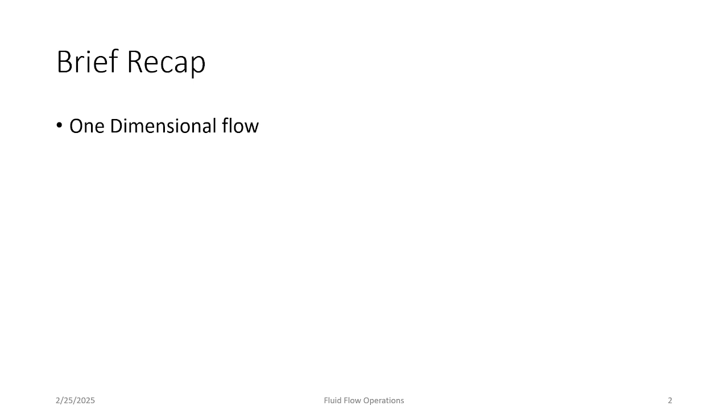and conservation of momentum. This week we'll be discussing the flow of viscous fluids. We'll be deriving the Navier-Stokes equation and looking at a few cases where we can apply it. But before going into this derivation, we need to first understand what is meant by viscous flow.

So what is viscous flow? In general, all the equations that we derived earlier are based on ideal fluid. We assume ideal behavior of fluid and derive equations based on that. What is an ideal fluid? It is nothing but a non-viscous fluid, meaning we assume the liquid has zero viscosity, so it's a non-viscous liquid, which is an ideal fluid. Based on these ideal properties, we derived all these equations.

But in general, this is just an assumption. There is nothing called an ideal fluid. Using this ideal fluid assumption, we derived and discussed the basic equations based on mass, energy, and momentum. But in practice, there's nothing like an ideal fluid, because every liquid existing in nature has viscosity; there is no liquid with zero viscosity.

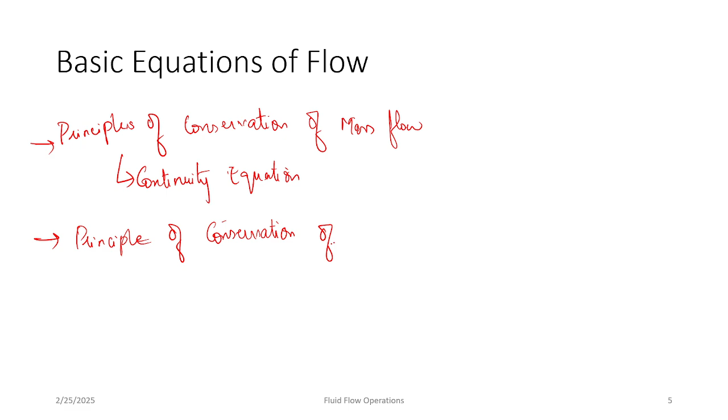So we have three basic equations. The first one is the principle of conservation of mass flow, also known as the equation of continuity. Then we have the principle of conservation of energy, also known as the energy equation. And then we have the principle of conservation of momentum. These are the three basic equations we derived in the earlier class.

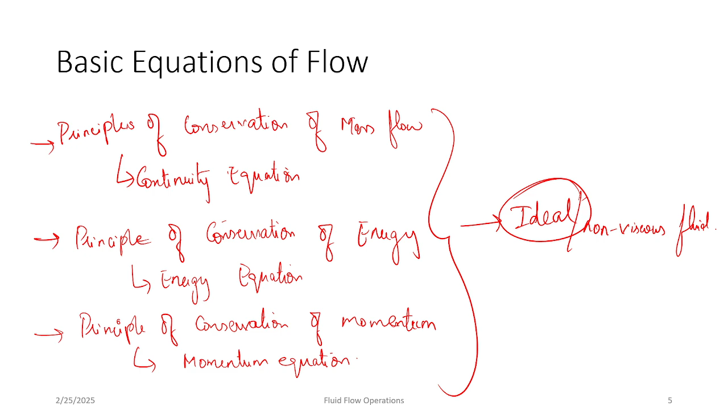In all these three equations or laws, we assume that the fluid is ideal, or non-viscous. Whereas in practical or real cases, we don't have anything called an ideal fluid, so we have to take into consideration all the viscous forces, which cause frictional losses. So here comes the Navier-Stokes equation for viscous fluids.

This equation was proposed by Navier, a French engineer and physicist. In order to derive this equation, let's assume an elementary rectangular fluid element. Let's say this is X and Y.

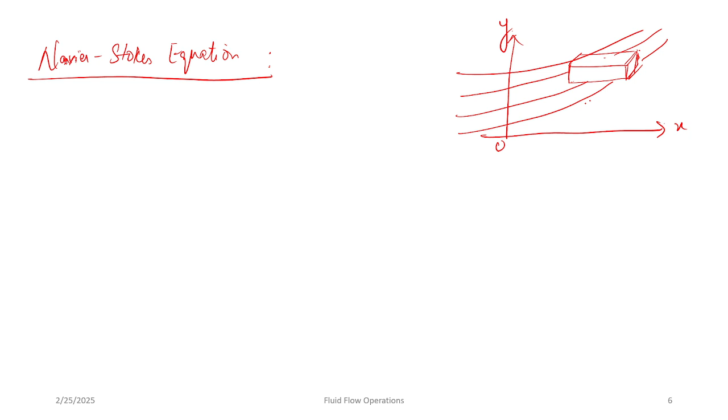Okay, so this is in stream of flow. Currently we are in two-dimensional. We'll be dealing with two-dimensional flow, so we'll be having both velocity in y direction and also velocity in x direction.

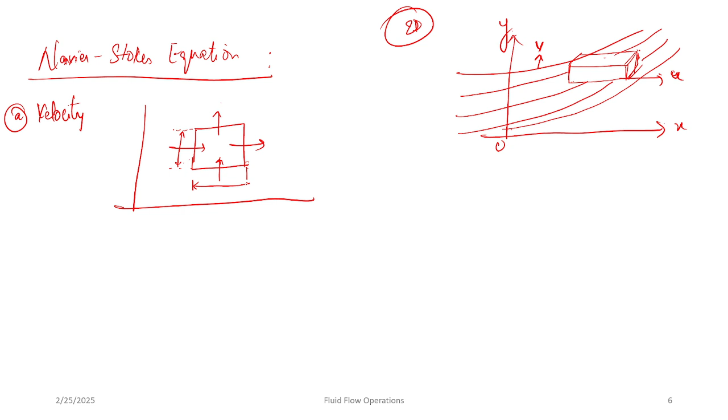Okay, so let's resolve this into different forces. First, let's check velocity. If we draw velocity profile for this elemental fluid, so dimensions of this elemental fluid will be dx and dy.

So in x direction, velocity will be u. After passing through this fluid element, there will be a loss or gain of energy. Let's denote it as dou u by dou x. So the final velocity will be u plus dou u by dou x into dx, that is change in velocity.

And also here initial velocity will be in y direction v, and the final velocity after passing the fluid will be v plus dou v by dou y into dy. So similarly, let's balance forces for pressure and angular deformation as well.

So coming to pressure, so again we'll take this as the dimension of the fluid element in y direction, that is dy, and this is the dimension of fluid element in x direction, that is dx. So again pressure will be P at the entrance of this fluid element, and at the exit it will be P plus dou P by dou y into dy. This is nothing but change.

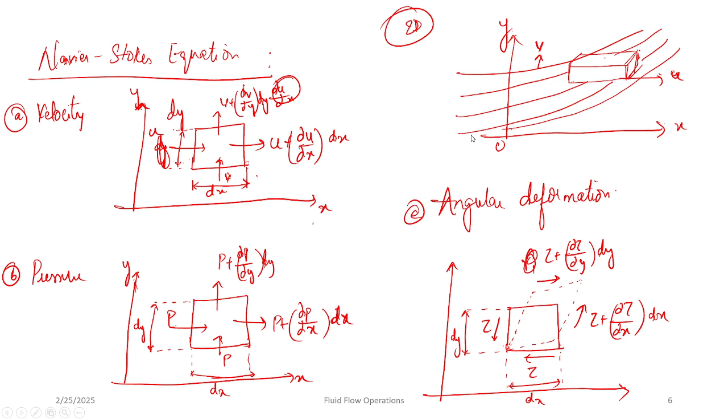So let's also consider this element, and we'll try to derive a relation between tensile stress and shearing stress.

Okay, so let's say this is the position of the fluid element initially, and you're applying a stress in this direction, or we are elongating the fluid element in the x direction. So if you're elongating it, what happens to the y direction? Force will be in this direction.

So when you're elongating the fluid element in x direction, there will always be a compression force acting in the y direction. So the final position of the element might be something like this, getting elongated in x direction and getting compressed in the y direction.

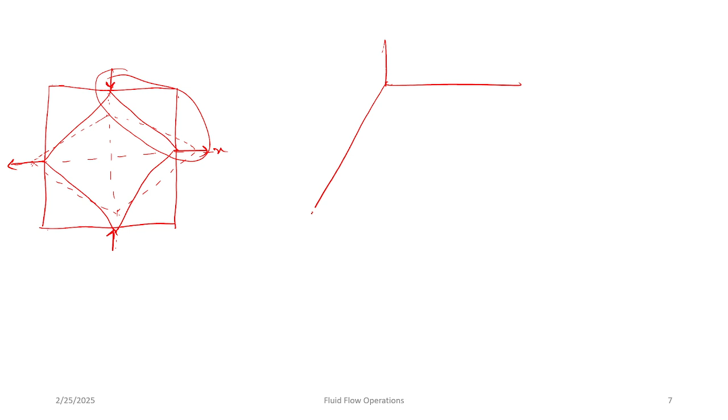So let's resolve this. Let's take this section. Let me first draw it. So if here the element is being displaced to a certain distance in y direction, through a certain distance, so in y direction it is compression force, and here it is elongation in the x direction.

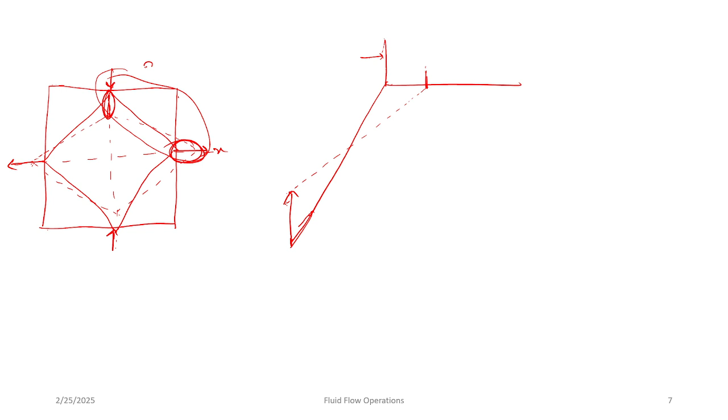So just try to observe both these diagrams and you'll be able to identify all the coordinates. So let's say here the fluid element is getting compressed through a certain distance - let's say this is dou v by dou y. And in x direction, let's say this is dou u by dou x. So this dou u by dou x and dou v by dou y, they should be same.

Even though they're in opposite direction, they should be same, because you cannot change the quantity of mass. But when you're increasing in one direction, it should always be decreasing in the same amount in the other direction.

Okay, so you're elongating in the x direction, so it will be compressed in the y direction, but through the same displacement. So let's say this is the elongation force that you're applying. Let's say this is sigma x, and this is also sigma x, but in the opposite direction, so this will be minus sigma x. And here, let's say this compression force is sigma y, and this is minus sigma y, because this is positive and this should be in the negative direction.

And the forces experienced by the side of the element, let's say this is tau. Okay, so these are elongation forces, and this is a shear. So these are tensile stresses, and this is a shearing stress. Tau is a shearing stress which will be experienced by the side of the fluid element. We'll use this when we are solving the problems. So whenever there is elongation on one side, there will be compression on the other side. So let's calculate the force equations.

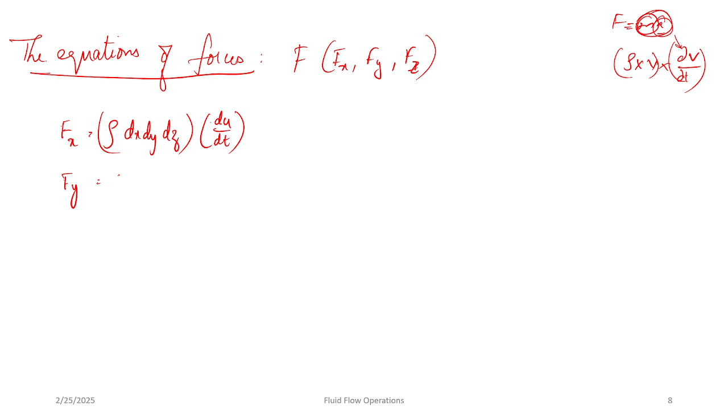And Fy will be rho into dx dy dz, that is mass into rate of change of velocity in the y direction, and Fz will be rho into dx dy dz into dw by dt.

The velocity change at time dt can be expressed as... let's say this is equation 1.

Okay, combining all these three, let's say this is 1, and du can be written as dou u by dou t into dt plus dou u by dou x into dx plus dou u by dou y into dy plus dou u by dou z into dz.

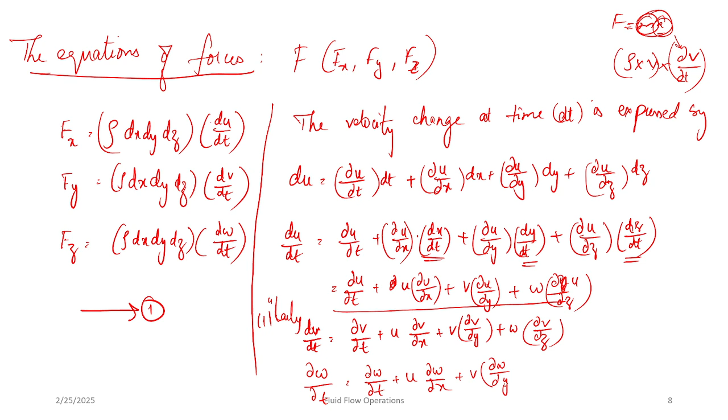So similarly, we can write for dV and dW as well. For dV by dt, we can write this as dou V by dou t plus U into dou V by dou x plus V into dou V by dou y plus W into dou V by dou z. And similarly for the z direction, it will be dou W by dou t plus U into dou W by dou x plus V into dou W by dou y plus W into dou W by dou z.

So if you substitute these values of velocities in equation 1, let's say this is equation 2, 3, and 4. So substitute 2, 3, and 4 in equation 1.

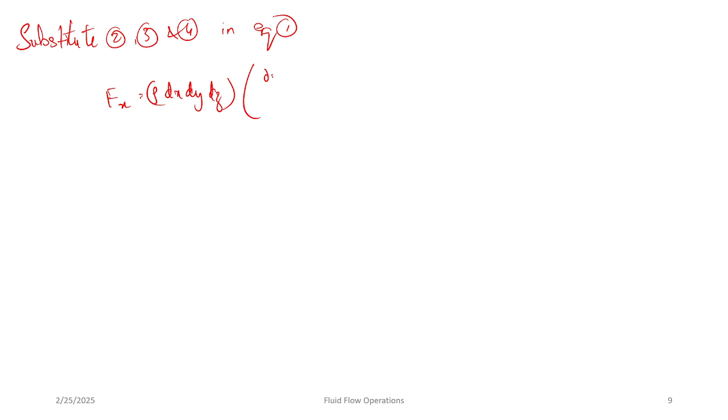So this gives us fx is equal to rho into dx, dy, and dz. This is mass, into velocity, that is du by dt. So this becomes dou u by dou t plus u into dou u by dou x plus v into dou u by dou y plus w into dou u by dou z.

And fy will become dou v by dou t plus v into... sorry, this is u, right?

u into dou v by dou x plus v into dou v by dou y plus w into dou v by dou z. And for the z direction as well, it will become dou in rho into dx dy dz into dou w by dou t.

Plus u into dou w by dou x plus v into dou w by dou y plus w into dou w by dou z. So let's call this equation 5. So whenever a fluid element is in water, or let's say in the fluid, it will be experiencing three different types of forces, right? It will be body force, the second one will be pressure force, and the third one will be viscous force.

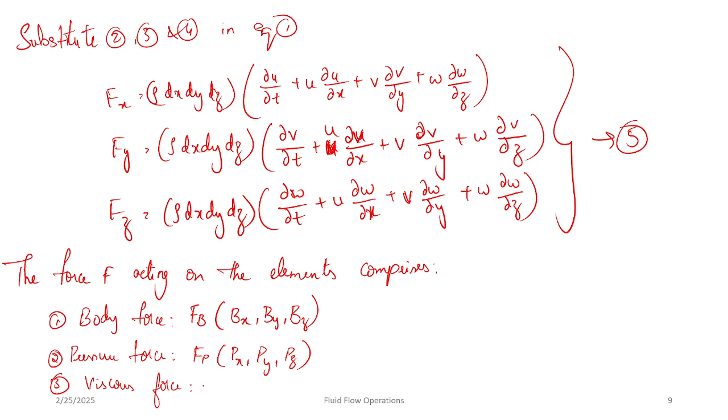So body force, that is FB, let's say this is represented by Bx, By, and Bz, where B stands for body force. And the pressure force, let's say this is FP, denoted by Px, Py, and Pz, the pressures in x, y directions. And viscous forces are FS, that is Sx, Sy, and Sz. These are the components in the three different directions.

So if you want to express Fx, that is the force experienced by the body in x direction, that will be a combination of body force in x direction, pressure force in x direction, and viscous force in x direction. So we can say Fx will be Bx plus Px plus Sx. Similarly, force experienced by the body in y direction will be By plus Py plus Sy, and Fz will be Bz plus Pz plus Sz. Let's call this equation 6 combinedly. So these are the three different forces experienced by the body.

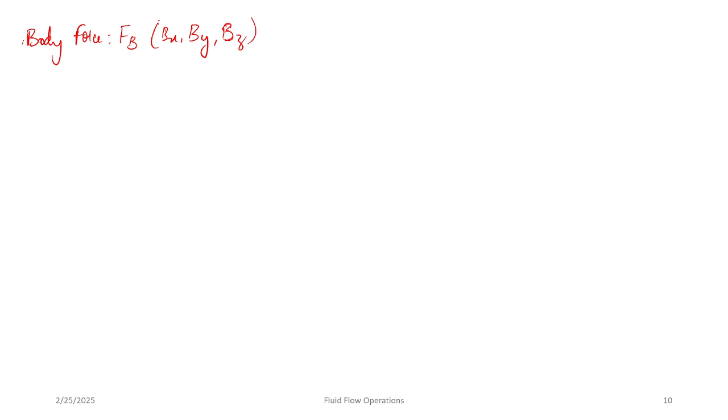So what are these body forces? Which forces are commonly called body forces? Body force, that is Fb, is represented by Bx, By, and Bz. These forces act directly through the mass of the substance or element. So these forces include gravitational force, centrifugal force, and electromagnetic force.

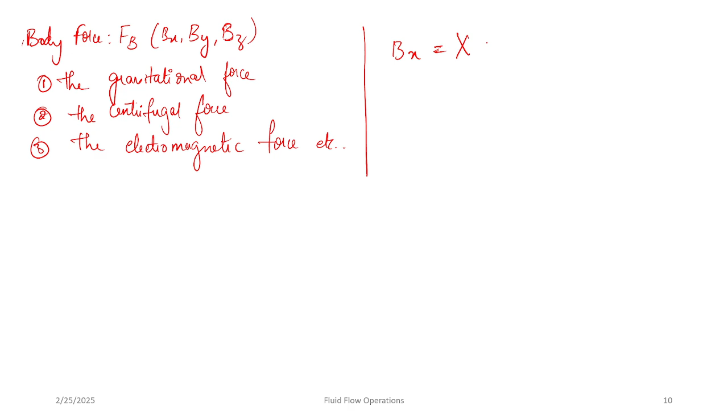So Bx will be basically the combination of all these three forces: gravitational, centrifugal, and electromagnetic. We can write this as X into rho dx dy and dz. So let's say X, Y, Z (capital) are the axis components of these body forces. If they represent the body forces experienced by the mass of fluid, then we can write Bx, By, Bz as follows. And then we have pressure forces, represented as Fp, also Px, Py, and Pz.

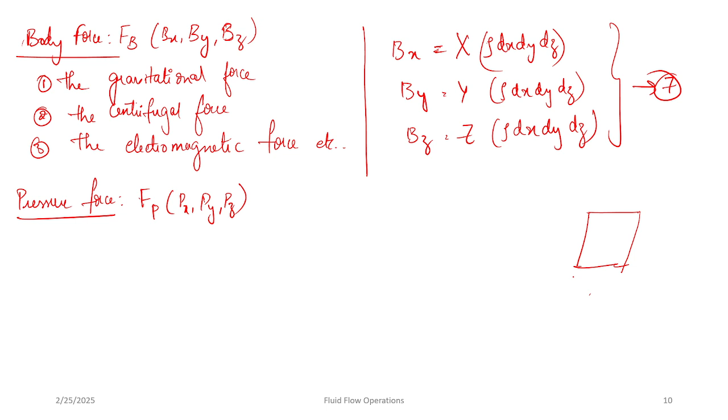So let's consider the fluid element. Let's say the flow is in this direction, that is the x direction. So the force experienced by this side will be pressure into area, since P is equal to F by A, so F will be P into A.

So the pressure exerted on this face will be P into the area of this element, that is dy into dz. And on this direction, the pressure exerted will be P plus dou P by dou x into dx, into the area of the element, that is dy into dz. Similarly, we'll have y and z components as well, so let's write them down.

So Px, that is the force experienced in the x direction, will be initial force minus final force. So initial force is P into dz into dy, minus final force, that is P plus dou P by dou x into dx, into dz dy. This will give us minus dou P by dou x into dx dy dz.

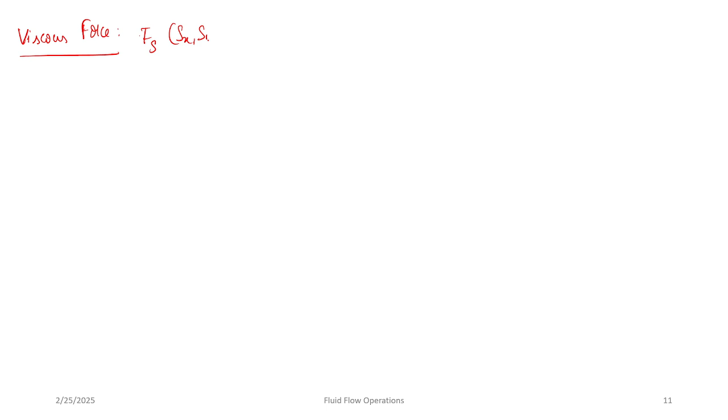So we have dealt with body forces, pressure forces, and now we are left with viscous forces. So let's also consider the viscous force. This is denoted by Fs, that is Sx, Sy, and Sz. So the force in the x direction due to angular deformation is represented by Sx1. Let's refer back to this diagram, from this we can write, and also whenever there is a stress, it will also be experiencing strain, right?

So Sx1 will be dou tau xy by dou y plus dou tau xz by dou z, multiplied by dz dx into dy. Because this is basically stress, and we want to calculate force, we multiply by area. This gives us mu into dou square u by dou y square plus dou square v by dou x dou y, plus dou square u by dou z square plus dou square w by dou x dou z, all multiplied by dz dx dy.

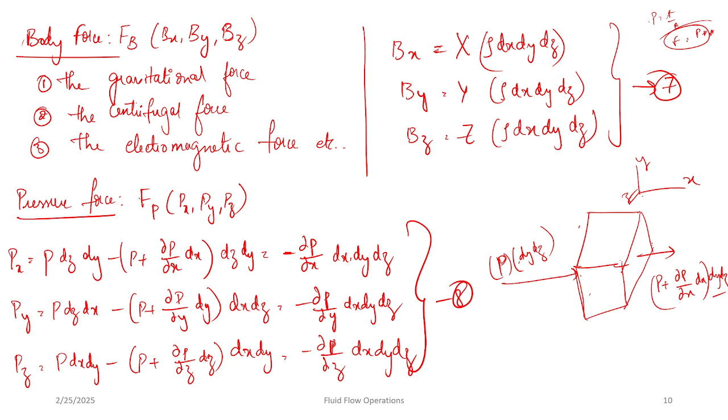We've already established this, I forgot to mention it earlier: dou u by dou x should equal minus dou v by dou y. If you differentiate this with respect to x, it becomes dou square u by dou x square, which equals minus dou square v by dou x dou y. So we'll use the same relation to replace this quantity. Instead of dou square v by dou x dou y, we'll be writing minus dou square u by dou x square.

So the forces in the x direction due to elongation transformation, that is Sx2.

Let's consider the rhombus that we were considering earlier. Let me go back. So let's consider this same element, say this is EFGH, inscribed in a fluid element ABCD of unit thickness, as shown in the figure.

Let the flow be elongated in the x direction, and in the y direction let it be a contracted flow. So in x direction we have expansion or elongated flow, and in y direction we have compression or contracted flow. This deformation in x and y directions provides a simple angular deformation, because of opposite directions at 90 degrees, which causes rotation of the face of the rhombus, resulting in a small shift in the face of the rhombus.

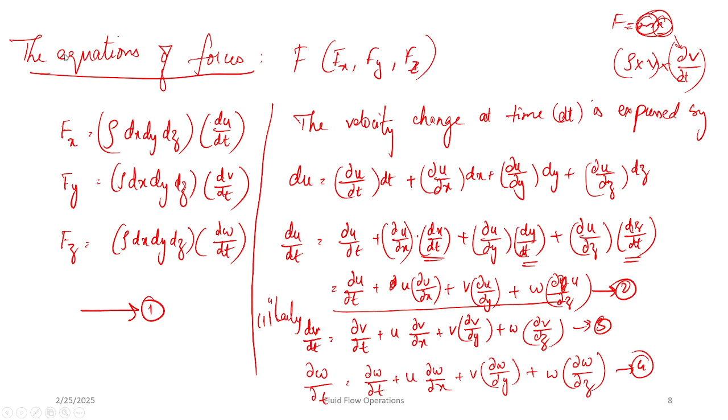Now we'll calculate the deformation per unit time, that is the velocity of angular deformation.

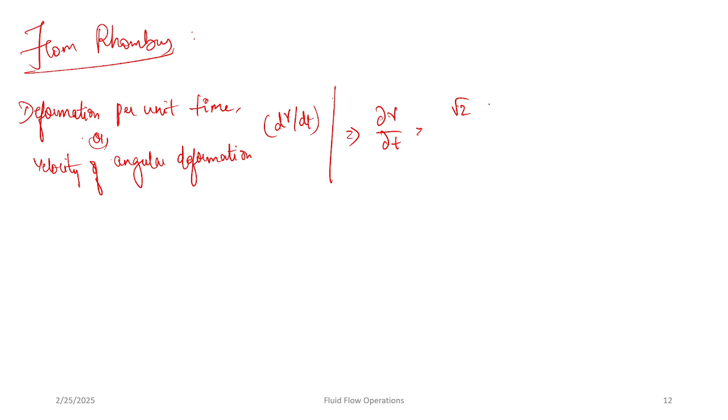This is expressed as d gamma by dt. We can write dou gamma by dou t as equal to square root of 2 into dou u by dou x, divided by root 2. This gives us dou u by dou x. This is equation 11.

Therefore, shear stress acts on all four faces, that is E, F, G, H. So tau will be mu into dou gamma by dou t, which equals mu into dou u by dou x. This is equation 12.

So for equilibrium of forces acting on EG, that is on this face, due to tensile stress sigma x and the shear forces tau on EH and HG, we can write sigma x as 2 into root 2 into tau cos 45 degrees. It will be 2 tau.

So sigma x will be 2 mu into dou u by dou x, right? Now consider the fluid element having sides dx, dy, and dz, where dz is the thickness. So the tensile stress in x direction at a distance dx will be sigma x plus dx, equal to sigma x plus dou sigma x by dou x into dx. Let's say this is equation 15.

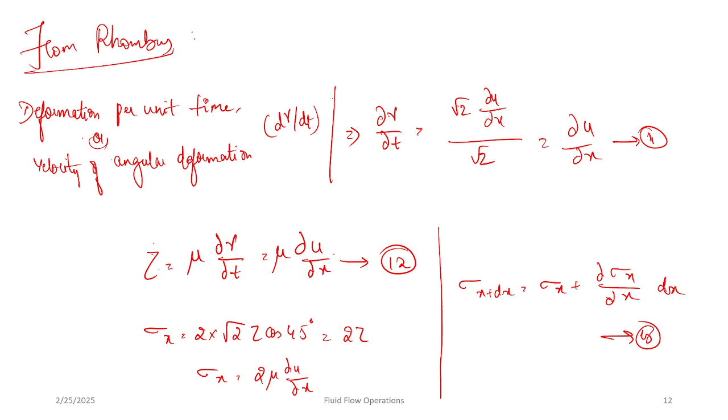So the tensile stress in x direction acts on the face of area dy dz. So Sx2 in xy direction will be minus sigma x into x, so sigma x in x direction into dz dy, plus sigma x at x plus dx into dz dy.

This will be equal to minus sigma x plus dou sigma x by dou x into dx into dz dy, which will be equal to dou sigma x by dou x into dz dy dx. This gives us 2 into mu into dou square u by dou x square into dz dy and dx. Let's say this is equation 16.

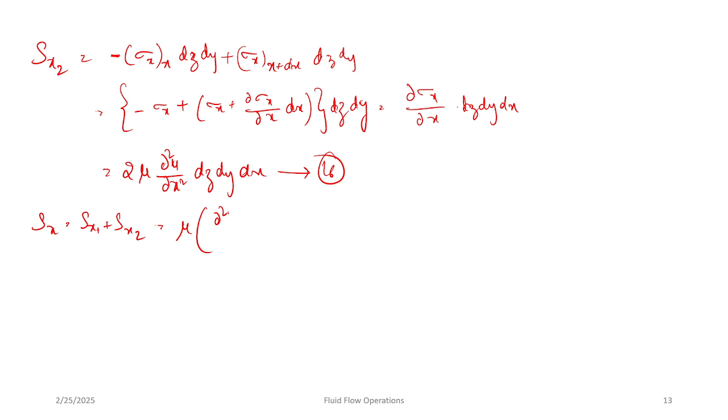From this you can write Sx as Sx1 plus Sx2. This gives us mu into dou square u by dou x square plus dou square u by dou y square plus dou square u by dou z square into volume, which is dx dy dz.

And Sy will be Sy1 plus Sy2, equal to mu into dou square v by dou x square plus dou square v by dou y square plus dou square v by dou z square into dx dy dz. Similarly Sz will be Sz1 plus Sz2, equal to mu into dou square w by dou x square plus dou square w by dou y square plus dou square w by dou z square into dx dy dz.

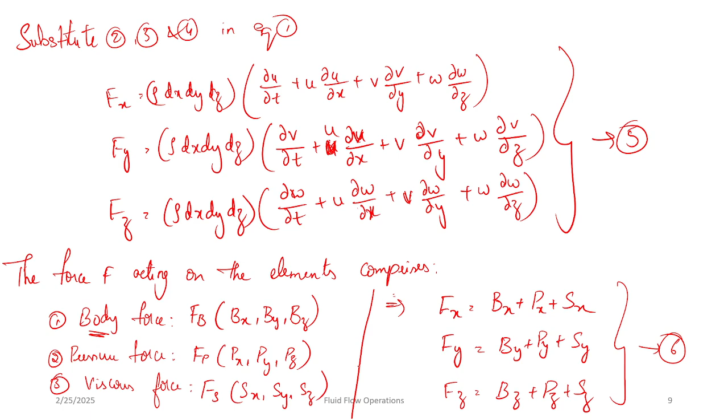rho into dou u by dou t plus u into dou u by dou x plus v into dou u by dou y plus w into dou u by dou z. This should be equal to rho x minus dou p by dou x, that is body force, pressure force, plus angular deformation force into mu into dou square u by dou x square plus dou square u by dou y square plus dou square u by dou z square.

And we also have rho into dou v by dou t plus u into dou v by dou x plus v into dou v by dou y plus w into dou v by dou z, which will be equal to rho into y minus dou p by dou y plus mu into dou square v by dou x square plus dou square v by dou y square plus dou square v by dou z square.

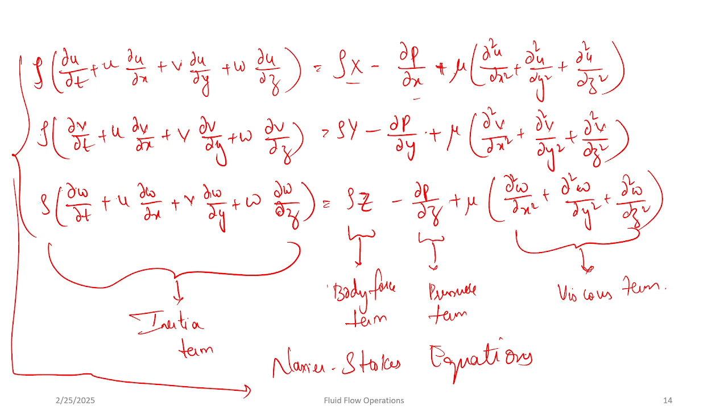Okay, so if you don't have any doubts, let's see the cylindrical coordinates as well. This is in Cartesian coordinate, right, in x, y, z. Let's also see the Navier-Stokes equation in cylindrical coordinates. So in the cylindrical coordinate system, the continuity equation for a constant density will be... first let's write the continuity equation.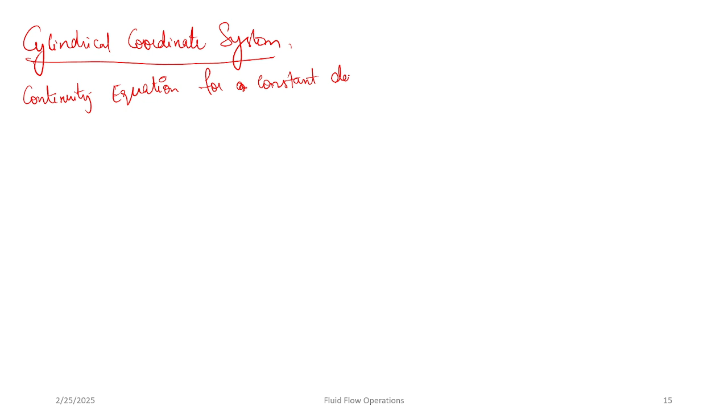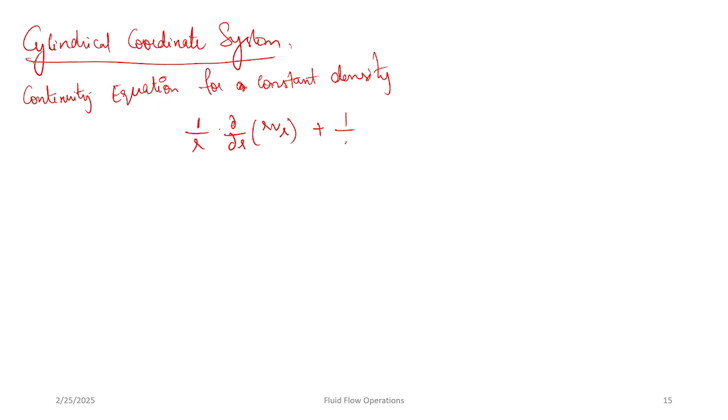So we have 1 by r into dou by dou r into r v r, plus 1 by r into dou by dou theta into v theta, plus dou by dou z into v z. This will be 0.

So normal and shear stresses in cylindrical coordinates for a constant density system and viscosity can be written as: sigma rr is equal to minus p plus 2 mu into dou vr by dou r.

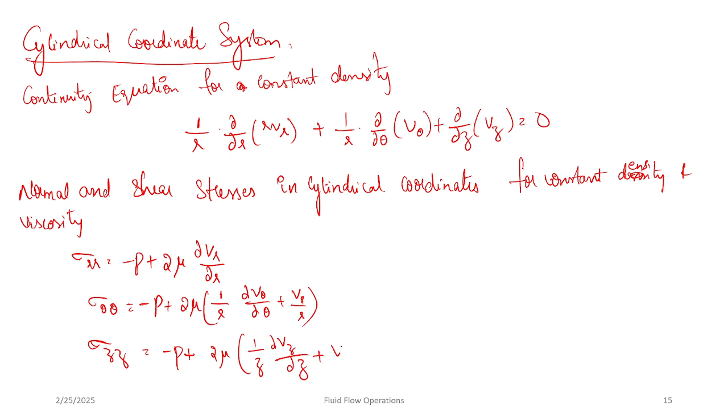Then sigma theta theta will be equal to minus p plus 2 mu into 1 by r into dou v theta by dou theta plus vr by r. And sigma z direction will be minus p plus 2 mu into 1 by z into dou vz by dou z plus vr by r.

Similarly, shear stress tau r theta will be equal to mu into r into dou by dou r into v theta by r, plus 1 by r into dou vr by dou theta.

And we have tau theta z will be equal to mu into dou v theta by dou z plus 1 by r into dou vz by dou theta.

And then we have tau z r will be equal to mu into dou vr by dou z plus dou vz by dou r. Okay, so this is for cylindrical coordinate system.

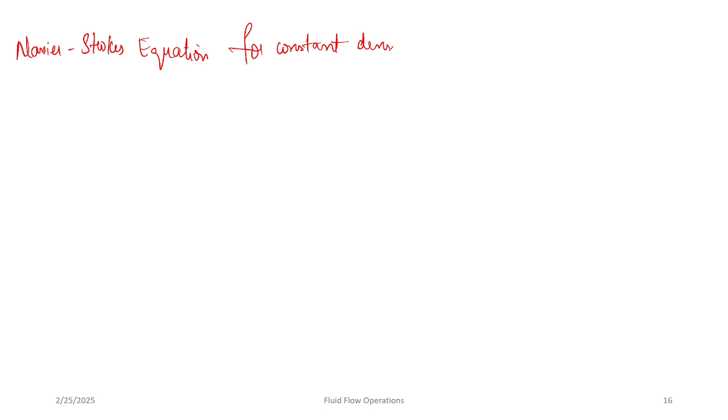So the Navier-Stokes equation in cylindrical coordinates for constant density and viscosity will be given. This is in cylindrical coordinate system. Okay, first the R component.

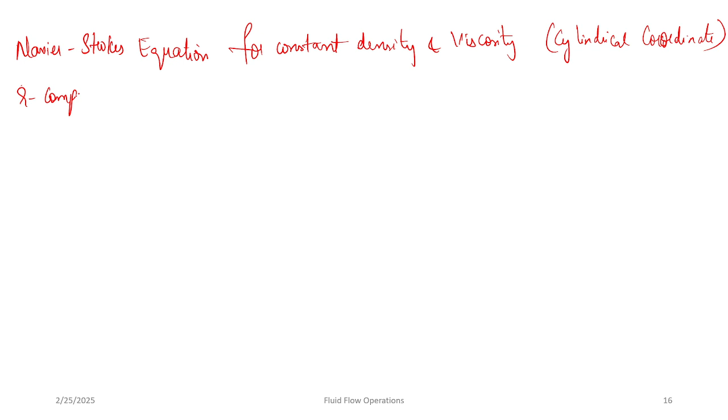So R component will be rho into dou VR by dou T plus VR into dou VR by dou R plus V theta by R into dou VR by dou theta minus V theta square by R plus Vz into dou VR by dou Z. This should be equal to body forces, that is rho gR minus dou P by dou R, which is the pressure term,

plus the viscous term, that is mu into dou by dou R into 1 by R into dou by dou R into R VR, plus 1 by R square into dou square VR by dou theta square, minus 2 by R square into dou VR by dou theta, plus dou square VR by dou Z square.

So cylindrical coordinates is a bit complicated, right? That is why we are having these many terms and it's a bit confusing. So don't worry. If you are comfortable with cylindrical system, you'll be able to understand this.

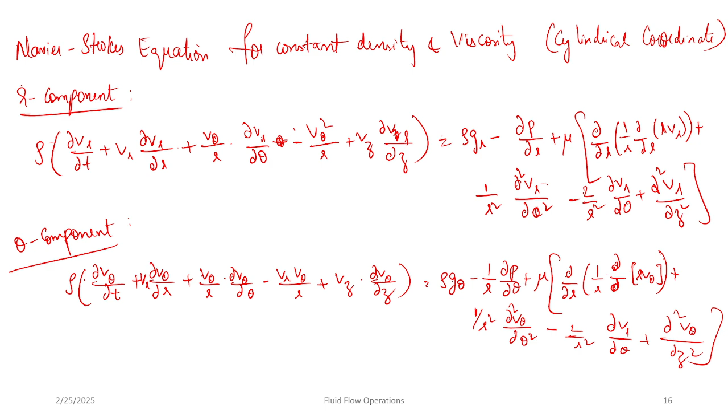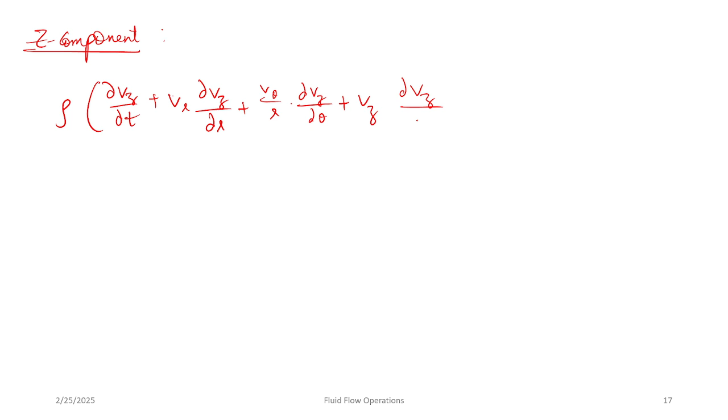Okay, so and then we have the z component. This will become rho into dou vz by dou t plus vr into dou vz by dou r plus v theta by r into dou vz by dou theta plus vz into dou vz by dou z. This should be equal to rho into gz minus

dou P by dou Z plus mu into 1 by R into dou by dou R into R dou VZ by dou R, plus 1 by R square into dou square VZ by dou theta square, plus dou square VZ by dou Z square.

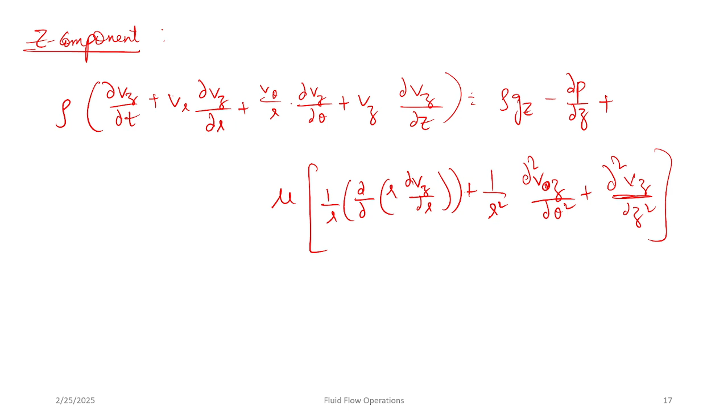So if we take an example, I think we'll be late, so I'll just move on to the next concept, that is velocity distribution of a laminar flow.

In the Navier-Stokes equation, the convective acceleration term is a non-linear term, so it will be difficult to obtain an analytical solution for general flow. The strict solutions obtained to date are only for special cases: one is flow between parallel plates, the other is flow in circular pipes.

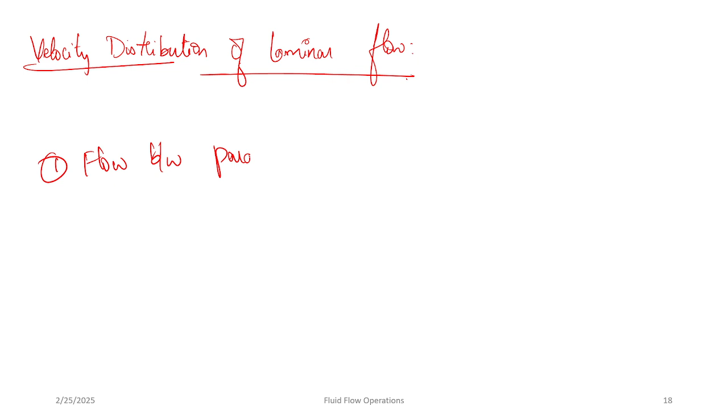The first one is flow between parallel plates, and the other special case is flow in circular pipe. These are the only two special cases where we got a strict or exact solution using Navier-Stokes equations. For other cases we will not be able to do it, because the convective acceleration term is non-linear. But before solving this problem, let's go back and revise a few concepts—we already discussed laminar and turbulent flow, right?

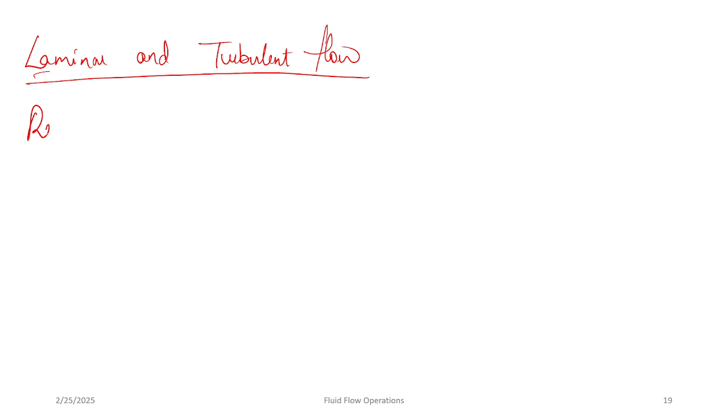So how do we distinguish between laminar and turbulent flow? We will be using something called Reynolds number, also represented as Re. So if Re for a particular fluid stream is less than 2300, we call it laminar flow.

We call it laminar flow, and this laminar flow is predictable, and there will be slow mixing. And if Re is in between 2300 and 4000, let me write like this: 2300 less than Re less than 4000.

So then this is called transitional flow. Here we have turbulent outbursts, so turbulence starts in this region, and then we have Re greater than 4000, which indicates that we are in turbulent motion. This is unpredictable, and there will be rapid mixing.

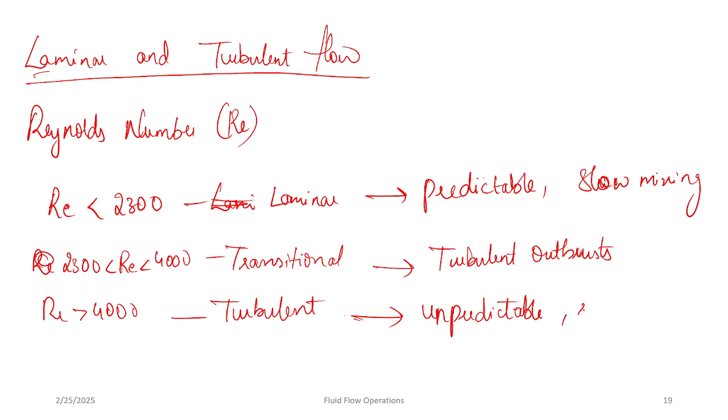Okay, and how do we represent Reynolds number? Re is given as rho u d by mu. Also written as inertia force by viscous force. So this is a non-dimensional number.

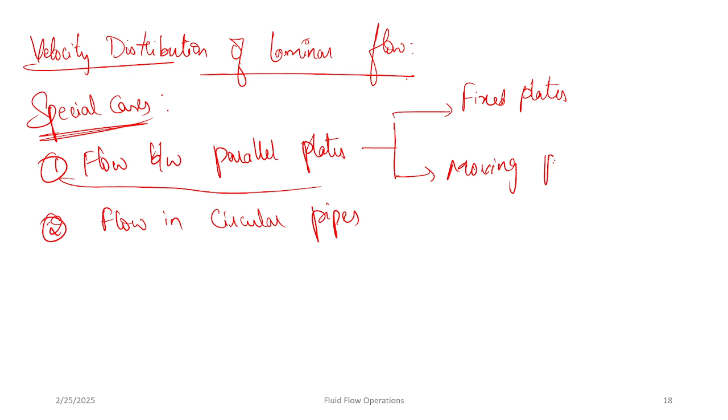So for the first special case that we are discussing, that is flow between parallel fixed plates - flow between parallel plates. Even in this first type, in flow between parallel plates, we have fixed plates, and then we have moving plates. So we have two cases again in this. There's a name for this as well, I'll write it down in a while.

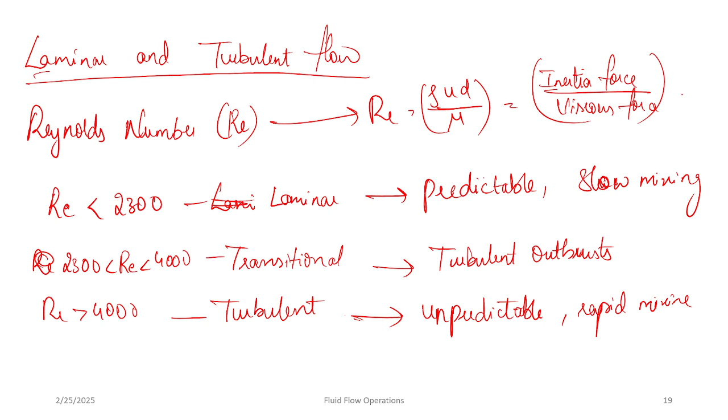So flow between parallel fixed plates - this is called Poiseuille's flow. So let's consider a flow of a viscous fluid between two parallel plates.

Let me draw the figure. So let's say this is a fixed plate and this is also a fixed plate, and they are parallel to each other. And let's say a viscous fluid is flowing in the stream between the two parallel plates. This has just passed the inlet of the flow, and this is at laminar conditions.

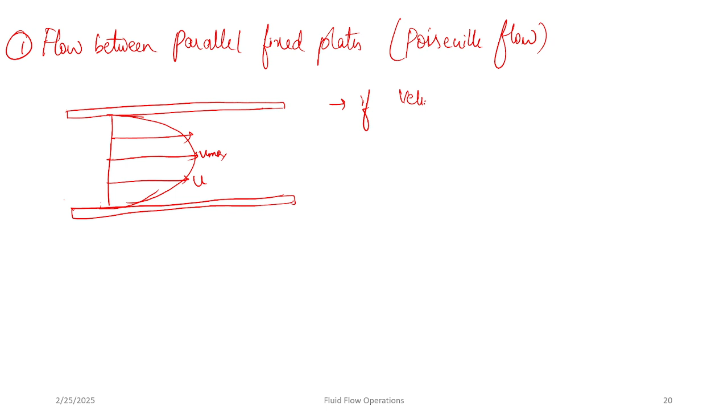So this will be your U max, and this is the velocity at any location, U. So if the velocity is only U, then that is only in one dimension, then V and W will be zero.

If the flow is steady, then U does not change with time, right? If flow is steady, U does not change with time. So dou U by dou T will be zero.

And if there is no body force, we can write rho X as zero. That is the body force term which was in the Navier-Stokes equation, right? So that will be zero.

And if the flow is uniform, then U will also not change with position. If the flow is uniform, U does not change with position, so dou U by dou X will also be zero. These are the assumptions or conditions that we'll be taking for this case.

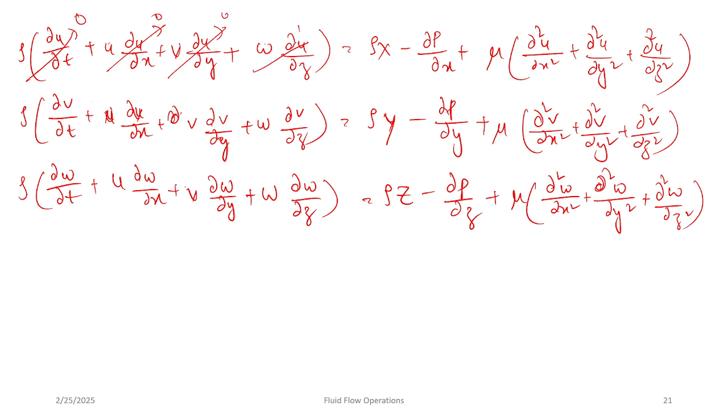Also, there's no change with position, so these terms will be zero. We know there is no body force, so this will be zero, this will be zero, and this will be zero. In the Y and Z directions, there is no flow, so these quantities will be zero. There will be no pressure difference as well, and these terms will also be zero. Dou square u by dou x will be zero, and dou square u by dou z will also be zero, since u is changing only with the y direction.

So this will be the only term left. We'll be left with mu into dou square u by dou y square equals dou p by dou x. Let's say this is equation 1.

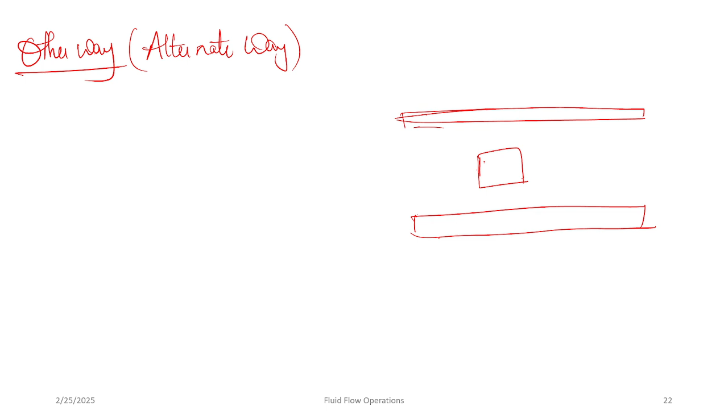You can either use this or do it a different way by considering the fluid element. Let's take two parallel plates again, and consider a fluid element here with dx and dy as dimensions. This is the pressure force, and the shear stress will be tau plus dou tau by dou y into dy, and this will be p plus dp by dx into dx.

Now balance all the forces. Consider balancing all the forces. If you do it right, you will get the same term.

Since there is no change in momentum between the two faces, we can write the equation as p into dy minus p plus dp by dx into dx into dy, minus tau dx plus tau plus d tau by dy into dy, into dx, equals 0. That is equation 2. Just cancel out all the similar terms, and this gets cancelled out, and you are left with d tau by dy equals dp by dx.

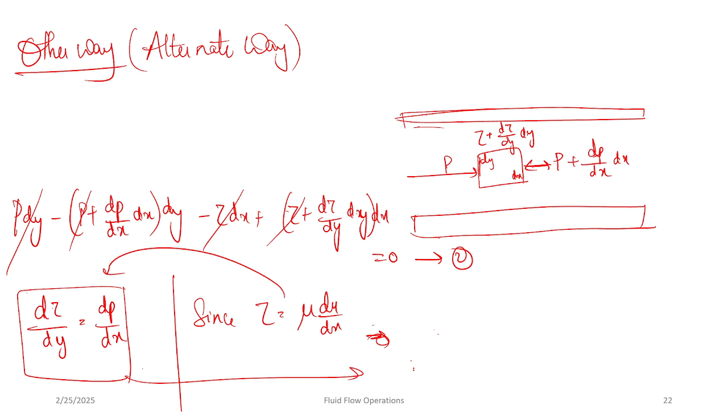Since we have tau as mu into du by dx, if you substitute this in the equation, we get mu into d square u by dy square equals dp by dx. That's equation 3. So you got the same equation, right? Even if you do it from the equation of continuity or if you balance out the forces, you should get the same equation. Now let's take equation 3 and integrate it.

What was the equation? Mu into d square u by dy square equals dou p by dou x. Let's carry out integration. We get mu into du by dy equals dou p by dou x into y plus c1, that's the constant, equation 4. If you further integrate this, you get u equals 1 by 2 mu into dou p by dou x into y square plus c1y plus c2. Let's say this is the second constant.

So we can use boundary conditions to solve for C1 and C2. At y equals 0, and at y equals h, we have two conditions. U will be 0, right? So we'll use those conditions. Boundary conditions: at y equals 0, u is equal to 0, and at y equals h, u will be 0 again. If you apply both these boundary conditions, you have two conditions and two unknowns, so you'll be able to solve it.

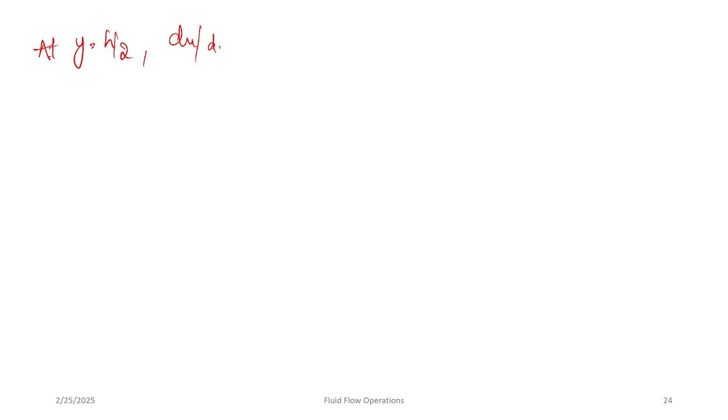You can also calculate flow rate and mean velocity using this. Let's see how. At y equals h by 2, du by dy should be 0 because at the center point u is maximum, u becomes u max. If it's a maximum, then its differential should be 0 - at minima and maxima, du by dy should be 0. So if you use this condition, you will be able to solve for u max.

So u max will be - sorry, if you substitute y equals h by 2 in this equation, you will be able to obtain u max, that is minus 1 by 8 mu into dp by dx into h square. This is equation 7.

So this is equation 6 and this will be 7. Okay, so now volumetric flow rate, how do you calculate it? Volumetric flow rate Q will be equal to area into velocity, right?

So that will be integral 0 to h of u into dy. That equals minus 1 by 12 mu into dp by dx into h cube. Just solve the entire thing, you'll be getting this. So that is equation 8.

And mean velocity or average velocity, u mean will be equal to Q by h, that will be equal to minus 1 by 12 mu into dp by dx into h square.

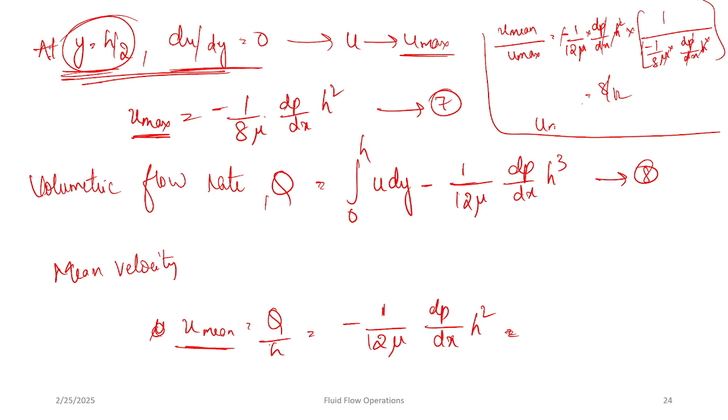So u mean will be equal to 8 by 12 of u max, right? This will be nothing but u mean, sorry, u max by 1.5. Let's say this is equation 9. U max is equal to U mean into 1.5. Okay, so let's say this is equation 9.

And now, what would be the shear stress? What will be the shear stress due to viscosity in this region? So what is the formula for shear stress? That will be tau is equal to mu into du by dy, right? We already have du by dy.

So just take this mu to the other side and we'll be able to get the equation for du by dy. If you substitute this here, or maybe you can directly use this equation. We also know the value for C1, so using these boundary conditions, we already got the value for C1. You substitute it, and if you substitute equation 4 here, you'll be able to get the equation for tau, that is shear stress. This will be equal to minus 1 by 2 into dp by dx into h minus 2y. Let's say this is equation 10.

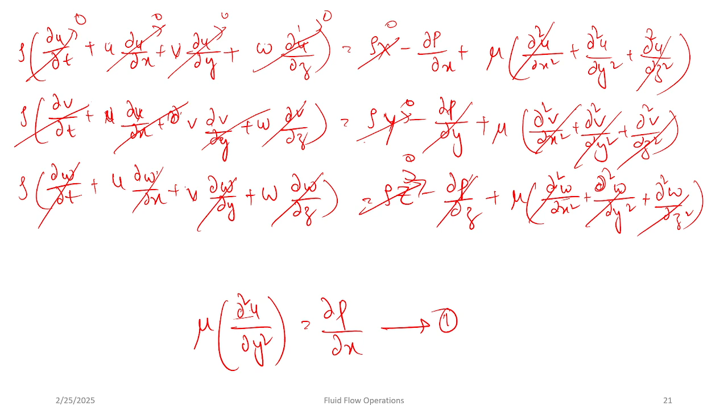And if you integrate this in the x direction, then we'll be obtaining minus dp by dx as delta p by L. So if you use this equation, or if you substitute this in equation 10, we'll be getting tau is equal to 1 by 2 into delta p by L into h minus 2y.

And similarly, Q will be equal to 1 by 12 mu into delta p by L into h cube. So I just substituted dp by dx value as delta p by L. So if you use this relation, we'll be able to solve for this.

So this is flow between parallel plates when they are stationary. They are called Poiseuille's flow. So that condition is called Poiseuille flow.

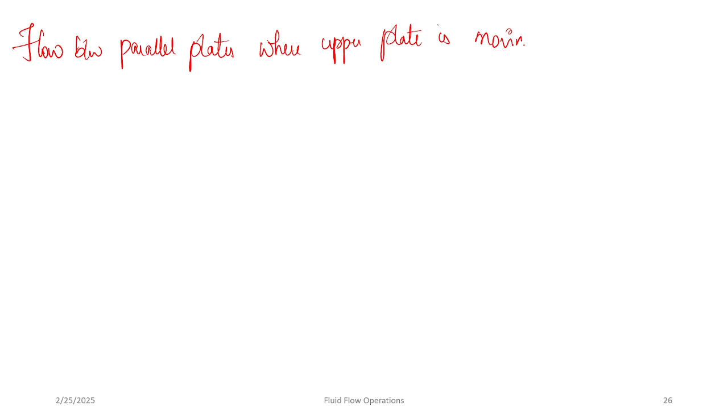And coming to the next case, that is flow between parallel plates when the upper plate is moving. This is called Couette flow. Flow between parallel plates where the upper plate is moving - this is called Couette flow.

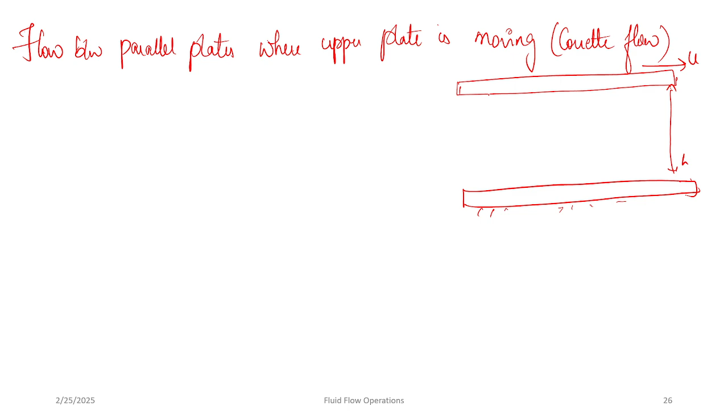Okay, let me draw the diagram once. So this is stationary - the lower plate is stationary, and the upper plate is moving with velocity U, capital U. And let's say this distance is H, and the flow profile will be something like this. So as the upper plate is moving, the layer which is adjacent to this wall will try to attain the same velocity. But as this plate is stationary, it will be zero.

So in this case, where the upper plate is moving in the x direction with a constant velocity, u or minus u, depending upon the direction. So from boundary conditions, you can say u will be 0 at y equal to 0, but u will be equal to capital U at y equal to h, because as the wall is moving, the adjacent layer will also be moving with the same velocity as the wall. So we'll be using the same equation.

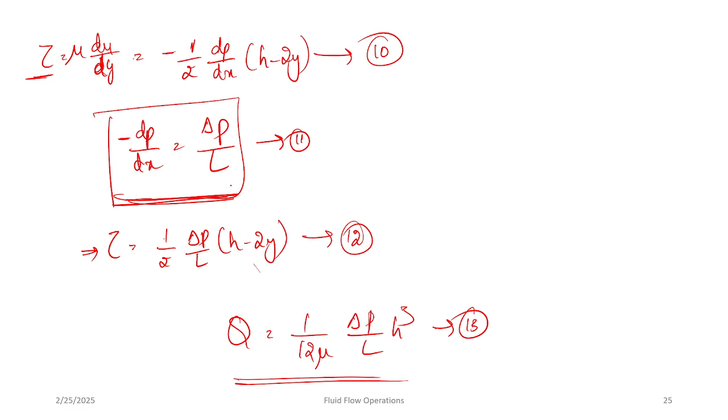So here, instead of using the previous boundary conditions, we'll just change the boundary conditions and substitute them in equation 5. We'll get u as 1 by 2 into del p by mu l into h minus y into y, plus or minus u into y by h. The plus or minus depends upon the direction of the plate in which it is moving.

So let's say if the flow of the fluid is in this direction, and the plate is moving in this direction, we'll have a plus sign. But if the plate is moving in the opposite direction to that of the flow, we'll have a minus sign. Let's say this is equation 14.

Now volumetric flow rate Q can be calculated as the integral from 0 to h of u dy, which will be equal to 1 by 12 mu into del p by L into h cube, plus or minus u h by 2. So this will be equation 15.

Maximum velocity and its position depends on the plate velocity. So at y equal to y max, du by dy should be 0, because at that place we assume u will be u max or u max star.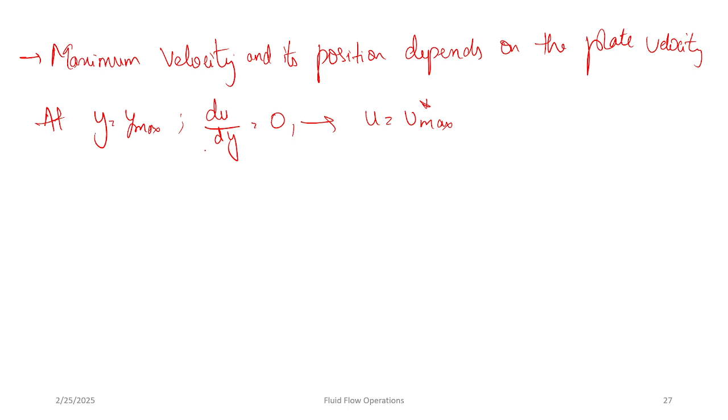So just differentiate and substitute the conditions. If you solve it, y max should be 1 by 2 into plus or minus u by h, by del p by 2 mu l, plus h. This will be the position of the maximum velocity.

And u max will be del p by 2 mu l into a plus b into a minus b, plus u by h. Here a is 1 by 2 into h, and b is u by h, by del p by mu l.

So this is the case for the plate moving in the direction of flow, where u max will be del p by 2 mu l into a minus b, a plus b, minus u by h. Just for the sake of simplicity, we are denoting these two terms as a and b. If you want, you can directly substitute these terms.

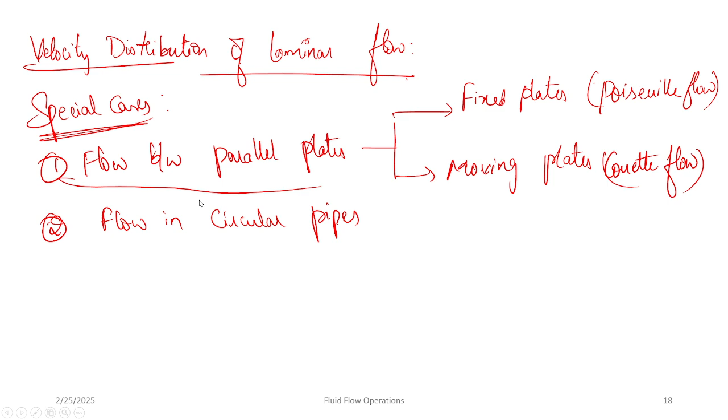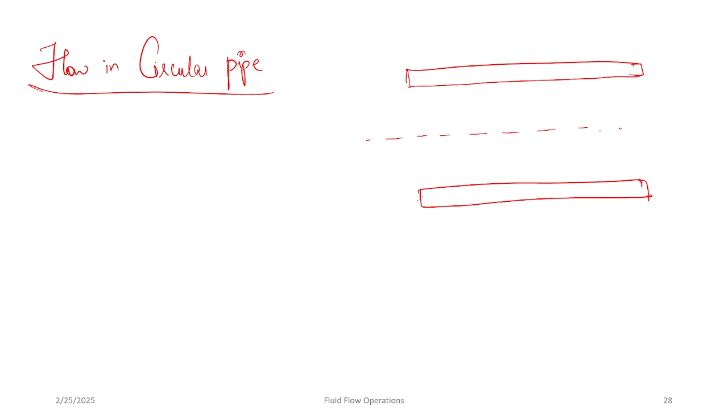One is flow between parallel plates, and then we have flow in circular pipes. Here we will be using symmetry because it's a circular pipe. So these are the adjacent walls, and this is the center of the pipe. The velocity profile will be something like this, where this is U max, this is Y, and this is R in the direction of R, and this is X.

Also, if you draw a profile for shear stress, at the center it will be minimum, and at the edges it will be maximum. This is the tau profile for shear stress.

So consider flow in a long cylindrical or circular pipe, which is an example of parallel flow with axial symmetry. In this case, it will be convenient to use the Navier-Stokes equation, which is basically in cylindrical coordinates. So we'll apply this here using the same conditions we used before.

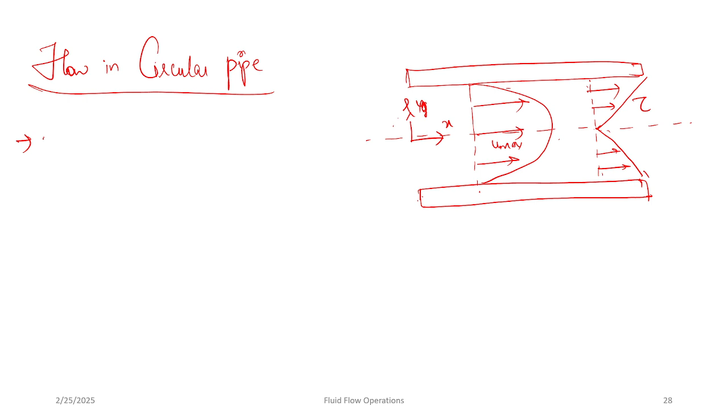We only have velocity u, that means Vt and V theta will be zero. Flow is steady, that means u does not change with time, so dou u by dou t will be zero. There are no body forces, so this will be zero, and flow is uniform.

So dou u by dou x will be zero. If you use these conditions and substitute them in the Navier-Stokes equation for cylindrical coordinates and simplify them, also use the boundary conditions. So finally you'll get the result. Let me write down the boundary conditions as well.

At r is equal to 0, if you use r is equal to 0, you'll get an infinite term, but as the term should be finite, C1 will become 0. And at r is equal to r naught, that is at the surface, u will be 0. So this is dou u by dou y should be 0 because u is maximum.

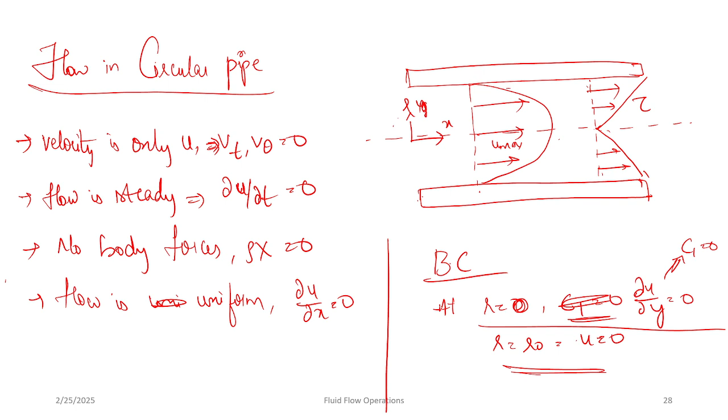This will be equation 20, right? This will be equation 20. So similarly, you can also find u max from this. U max will be minus 1 by 4 mu into dp by dx into r naught square. So this is equation 21.

And Q, that is the volumetric flow, will be equal to the integral from 0 to R naught of 2 pi U into dr. So this will be equal to minus pi R naught power 4 by 8 mu into dp by dx. This will be equation 22. And U mean will be equal to Q by pi R naught square, which will be equal to minus R naught square by 8 mu into dp by dx, which will be equal to 1 by 2 into U max. This is equation 23.

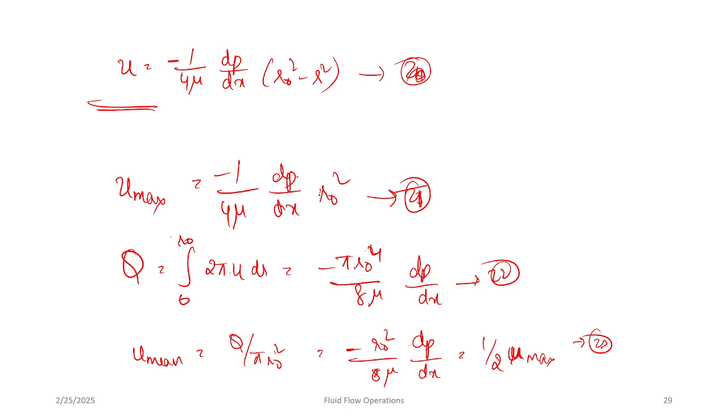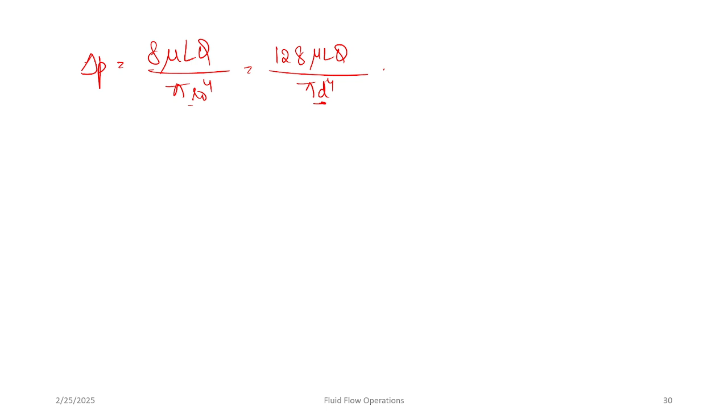So if you say that del P is the pressure drop across a length L, then the pressure drop equation can be written as del P equal to 8 mu L into Q by pi R naught power 4. This can also be written as 128 mu L Q by pi D power 4, just changing radius to diameter. So this will be equal to 32 mu L into U mean by D square. This is called the Hagen-Poiseuille's equation: del P by L is equal to 32 mu into U mean by D square.

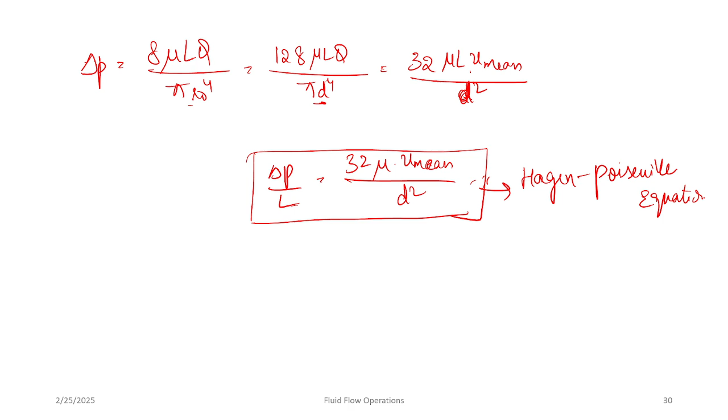This is the case for cylindrical coordinates. So we just took this equation and calculated dP by L, which is called the Hagen-Poiseuille equation. Using this equation, you can calculate the viscosity of a liquid by measuring the pressure drop across a circular pipe of a given length.

So there are a few more concepts, that is characteristics of turbulent flow. Until now we were only dealing with laminar flow, right? We have to do the same thing for turbulent flow, so a few things will be changing, like velocity and all these terms, but we are running out of time.

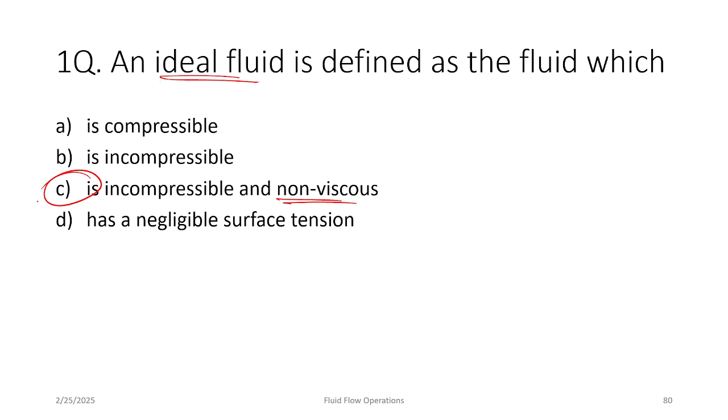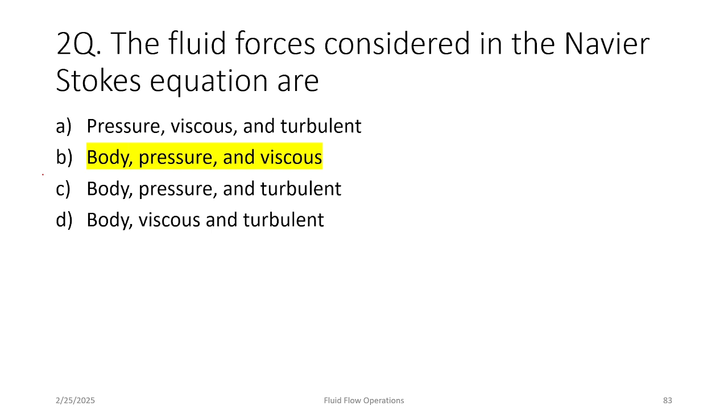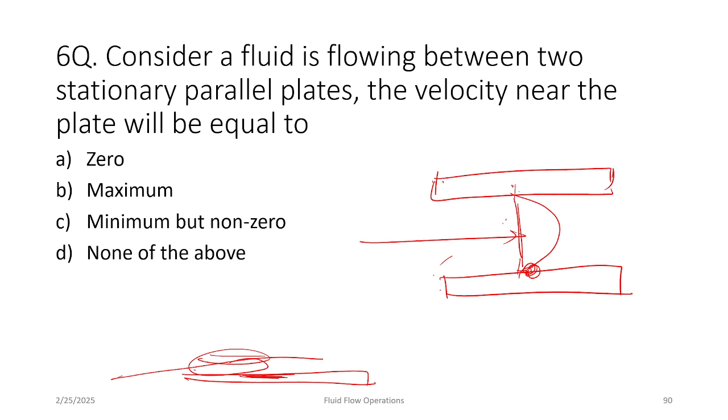Coming to the sixth question: consider a fluid flowing between two stationary parallel plates. The velocity near the plate will be equal to what? Whenever fluid flows over a plate, even a single plate, at the surface or near the surface of the plate, the velocity will always be zero. So even in laminar condition, it will be zero near the wall. So this will be option A.